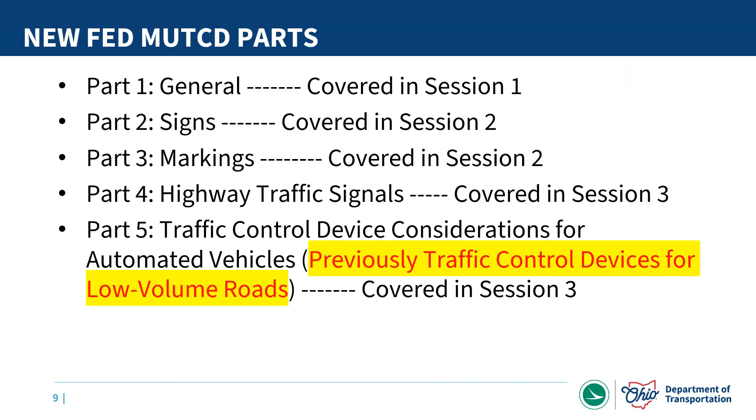Moving on, I want to talk briefly about how to go about using these two combined documents, broken down into a couple simple processes. First, take a look at which part and section of the MUTCD you're interested in, meaning the national MUTCD. Figure out what section is of interest to you. Once you've determined that, take a look at our Ohio Supplement table of contents. In that table of contents, we list all of the sections that have been carried over to the Ohio Supplement that have any Ohio specific content. If the area of interest shows up there, you just use that content in the Ohio Supplement. If it does not show up there, you just would be using the federal or national MUTCD. I want to stress that if there was any specific Ohio content in any part of a section, we made the call to pull that whole entire section over into the Ohio Supplement. We just didn't want users constantly leafing back and forth between the two documents. That was a purposeful decision.

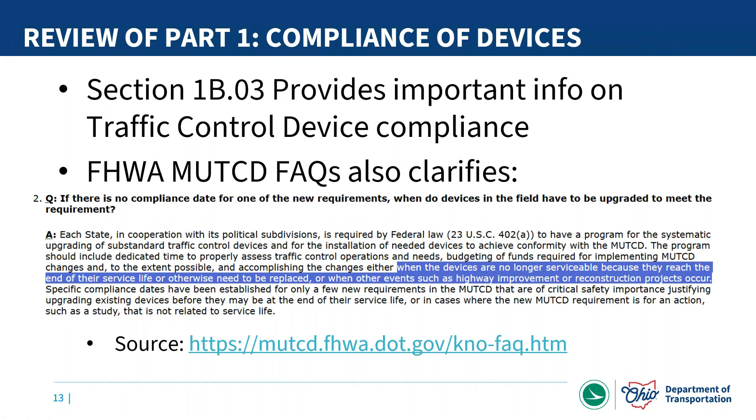Obviously, this is an important component. These have specific time frames for some of these different traffic control devices to be updated. So it's very important for the various jurisdictions to be aware of these timeframes.

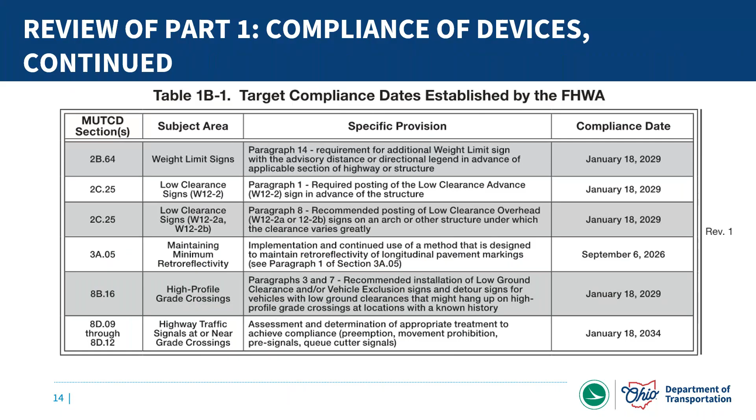Next, I just want to again do a quick review refresher on the definitions of the different headings that are used throughout the whole entire manual. This is not new - these headings were in the previous manual. You've got your standard, guidance, option, and support.

With standards, they have added the ability to deviate from a standard as long as there is a documented engineering study. That used to not be part of standards, at least initially. Now that language is part of the standard definition.

And then with the guidance definition, it's a small thing, but it's impactful. They did away with the 'but not mandatory' language in the previous manual. So essentially a guidance statement within the MUTCD needs to have either engineering judgment or engineering study in order to deviate from it. I think that but not mandatory language was confusing to some folks, so they did some clarifying there.

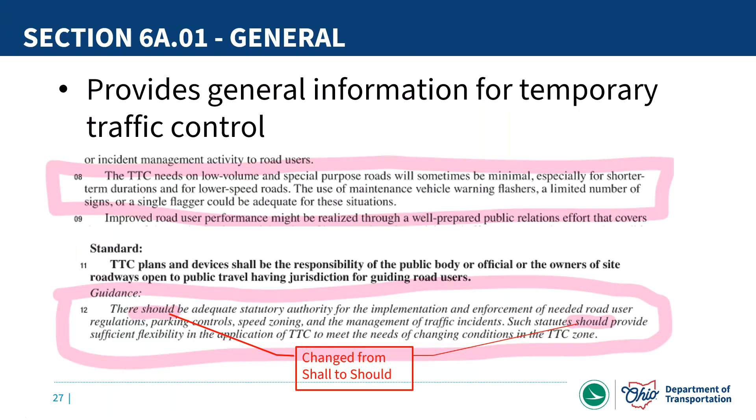Looking at 6A, there's just a couple things highlighted here up at the top. We talked about the low volume roads, and this is an example of where some content that used to be part of the previous chapter 5 of the previous MUTCD has now been moved into the different relevant sections. Down at the bottom, calling attention to this particular paragraph, how this was changed from a standard to a guidance statement, but obviously still important in either case.

With section 6A2, this is the fundamental principles of your different temporary traffic control zones. Most of this content came from 6B01 of the previous manual. If you're relatively new to temporary traffic control, this is a great section to review. There's a lot of good reference information here.

Continuing on in 6A02, there are 7 principles of temporary traffic control devices, and a couple of them I want to touch on further. Number 2: road user movement should be inhibited as little as practical. That's important, and there's a lot more emphasis on it now.

This came from some additional guidance in NTSB HAR 15-02. This talks about situations where the demand can exceed capacity, and where that could potentially lead to queuing. Obviously when you get queuing events, that can lead to some safety concerns and that type of thing. So some additional emphasis there.

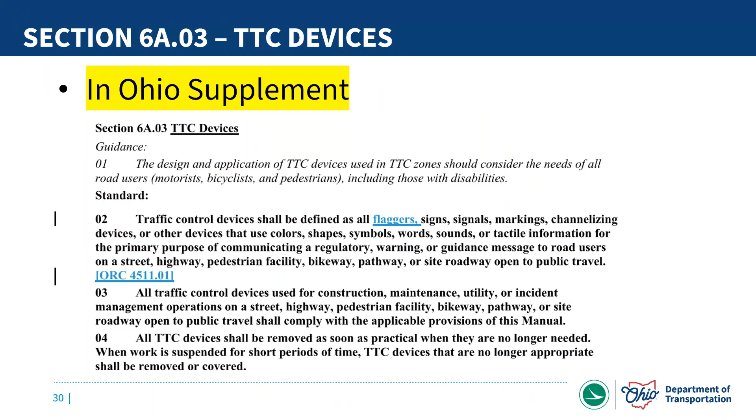So 6A04 and 6A05: 04 talks about crashworthiness of devices. All the different aspects and components of a temporary traffic control device - the majority of them have different crashworthy requirements. As far as ODOT projects, we have created approved lists of different devices that meet some of the different crashworthiness standards. We're still working through the transition period moving over into MASH crash testing, but for ODOT projects we have that information available for folks to use on our projects, and for any others that might want to check that information out as well.

As far as night work, there's a couple things to mention here. A lot of people automatically think, well, you just do the work at night, that's the solution. But you want to make sure that if you're doing night work, you have reduced traffic volumes, and your setups and teardowns of your zones are relatively easy. Otherwise there can be some issues that could arise, and that's what this is talking about, as far as some support information on that topic.

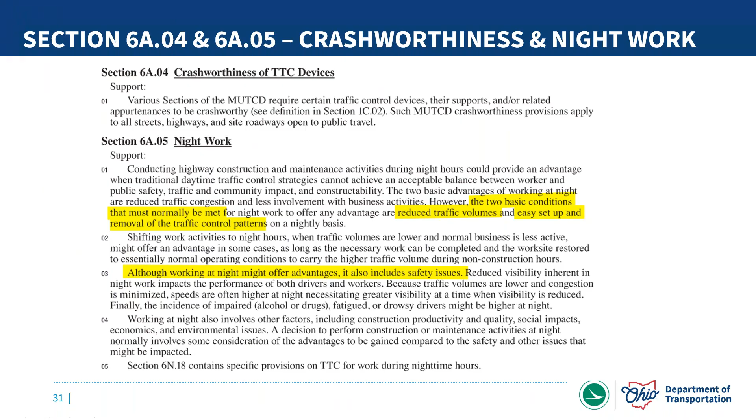Chapter 6B here, temporary traffic control elements. So we're going to take a look at all of these sections. 6B01 and 6B08 are part of the Ohio Supplement, so we'll take a little closer look here.

The other thing I wanted to point out about this particular section is this is another really good reference section for those folks that maybe are just getting started in temporary traffic control plan layout or design.

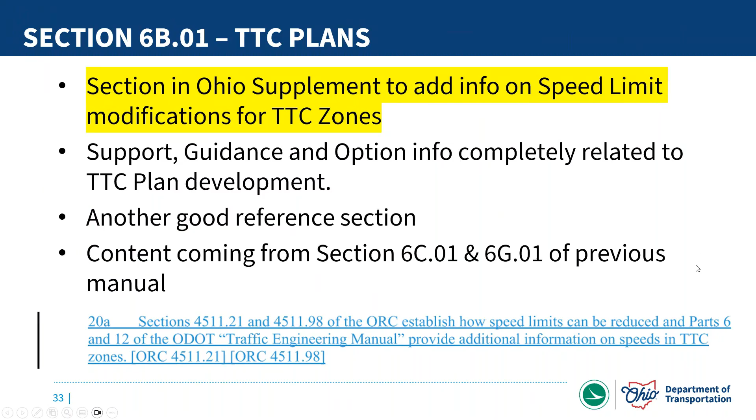Looking at 6B02 through 6B05, so this kind of breaks down the different components of a temporary traffic control zone. One thing I want to talk about briefly here, section 6B05, in fact, talks about mobile operations, and there's obviously some nuance with mobile operations that you need to be aware of, and how it obviously becomes much more difficult to provide channelizing devices for moving operations and things like that. So this has some good information there.

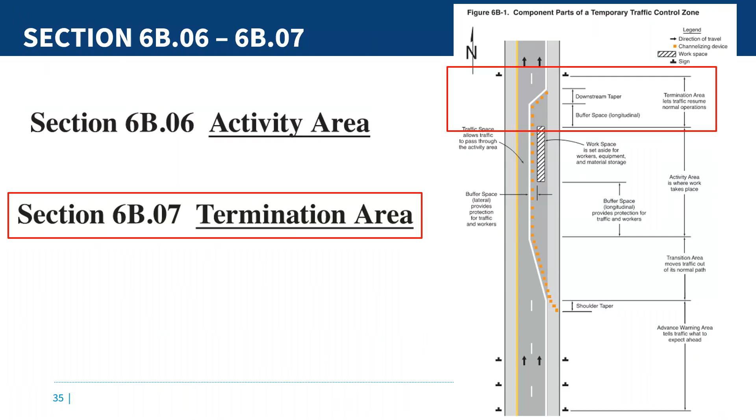So in section 6B08, this gets into the different tapers associated, from merging to shifting, shoulder tapers, etc. The thing I want to point out here is this section did have Ohio specific content. This content is the same content that we had previously in the OMUTCD document, but the change here is that we are increasing the length of the shifting taper in most instances. We give some criteria there as far as speed as well.

Again, with the taper section 6B08, just wanted to show this, there's a figure in there that's also part of the Ohio Supplement that just illustrates graphically what we're talking about as far as the shifting tapers and the modification that we have made Ohio specific.

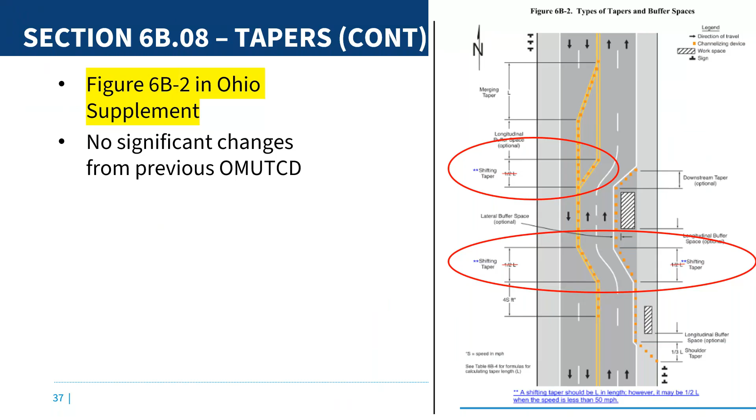6B09 just talks about basically the differences between a detour and a diversion. Diversions, I think a lot of people use the term maybe runaround as another term that's used, but that's basically when you're creating temporary pavement just to get around, say, a particular obstacle. Sometimes this is done, maybe a culvert replacement, that type of thing, even some bridge replacements do that type of a thing. Whereas a detour, you're actually closing the section that's being worked on, and you're using existing other highways to reroute that traffic around. So just the nuance between those two definitions.

Looking at Chapter 6C here, this gets into pedestrian and worker safety, which obviously is a big consideration. With the new manual, there's been an increased emphasis on safety of both the workers as well as pedestrians, bicyclists, etc. So this section gets into some of that.

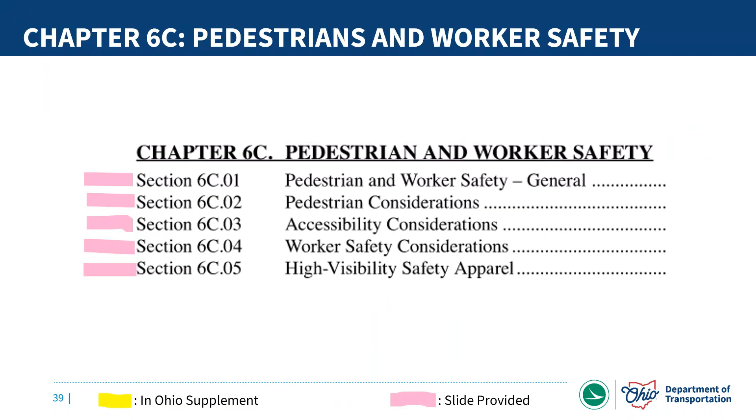Section 6C01. There's no real changes from the previous language here, but this again just emphasizes the need for the folks setting up these work zones to have the appropriate training and certification so that they can get the work zones set up appropriately and as safe as possible.

The next two sections, 6C02 and 03, get into some of the different considerations as far as pedestrians and accessibility. In a nutshell, if your particular work zone has pedestrian users, you need to be thinking about how you can accommodate those pedestrian users and not create more conflicts for those folks. Similarly, as far as accessibility goes, if an existing area has existing accessibility accommodations and we have to make adjustments there, work zones need to maintain those accessibility considerations.

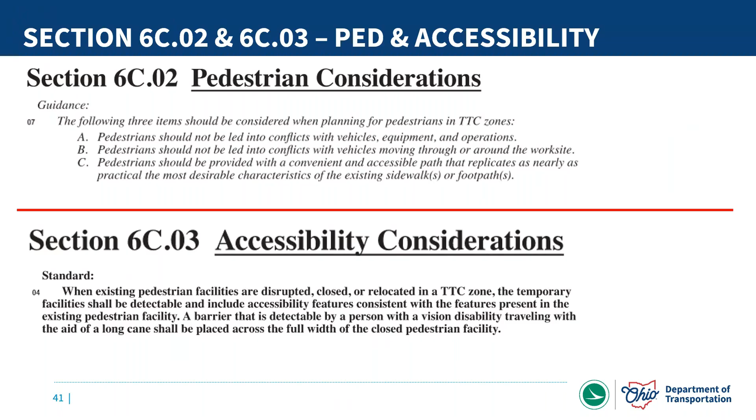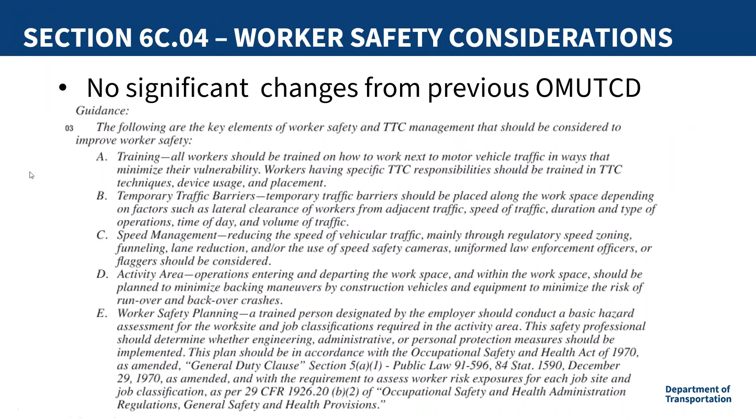In 6C04, again, this gets into worker safety considerations, and it lists off several different areas that anyone involved with setting up temporary traffic control needs to be thinking about, as ways to make these work zones a bit safer for our workers.

This continues on and talks about some of the different elements that can improve worker safety, like shadow vehicles if appropriate, road closures - obviously workers have increased safety during full closures - and then use of law enforcement officers or lighting and other newer devices, which we'll talk a bit more about later.

Section 6C05 gets into high visibility safety apparel. There was information in the previous manual that talked about this, but it was split up into multiple areas in Part 6 previously. So this is one of those examples where a lot of that information from the previous manual has been pulled from various locations and compiled into one particular section.

This gives the particular specs for your high visibility apparel. And this other highlight talks about how not only your roadside workers, but your first responders also need to be thinking about this high vis apparel as well.

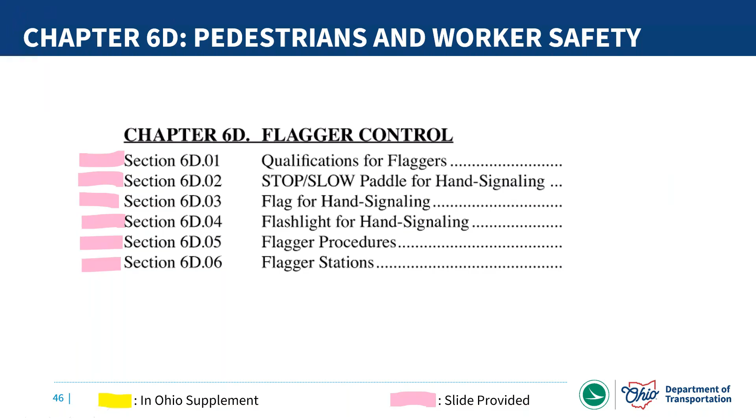First off, qualifications - again, just talks about what you need to be thinking about if you're looking to get one of your employees, if you're a construction contractor or work for ODOT or a city, what does a flagger need to be able to do? This gets into some of the things you need to be thinking about before just putting somebody out there to do the flagging operations.

These other sections here at the bottom, 6D02 through 04 - 02 talks about the stop slow paddle, which is our typical way of flagging a work zone in non-emergency situations. The other two they talk about are more intent - the intent is for those to be used primarily just in emergency type situations.

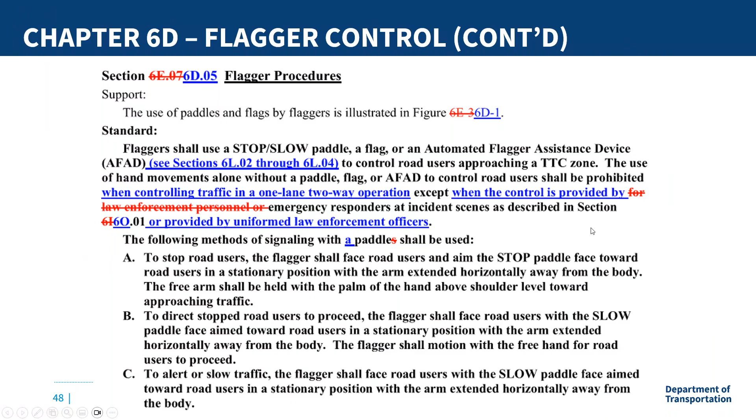These next couple slides, I just wanted to pull up and show - this is just a markup of the previous manual showing some of the changes included in the different flagging procedures, some addition of mention of specifically uniformed law enforcement officers. This is again just to show some of the changes from the previous MUTCD, and similarly here, again just showing some of the changes from the previous manual.

Obviously stopping sight distance, and sight distance in general, is a very important consideration when you're talking about flagging. So it adds a little bit of additional content there related to that.

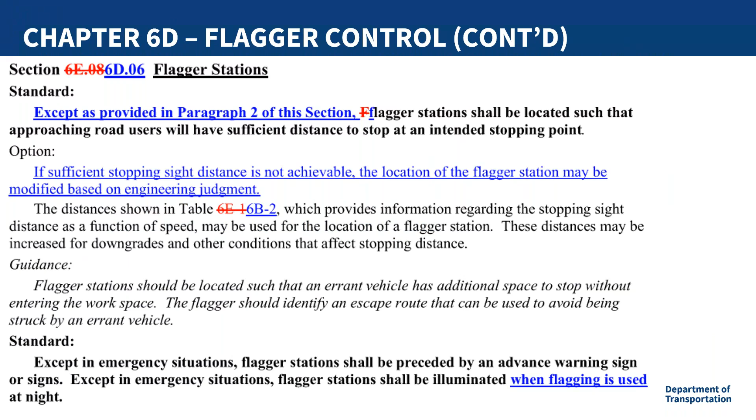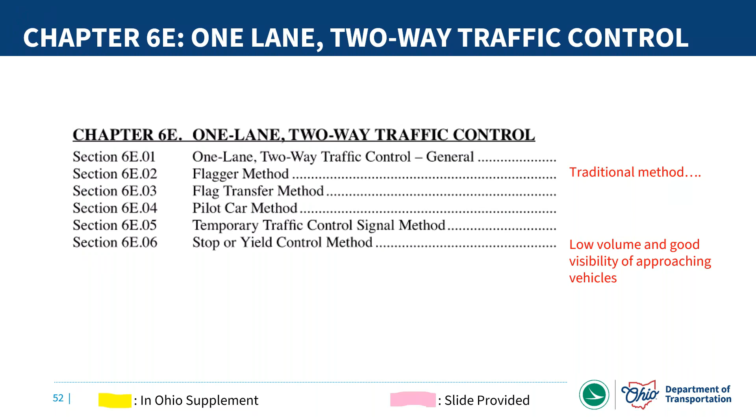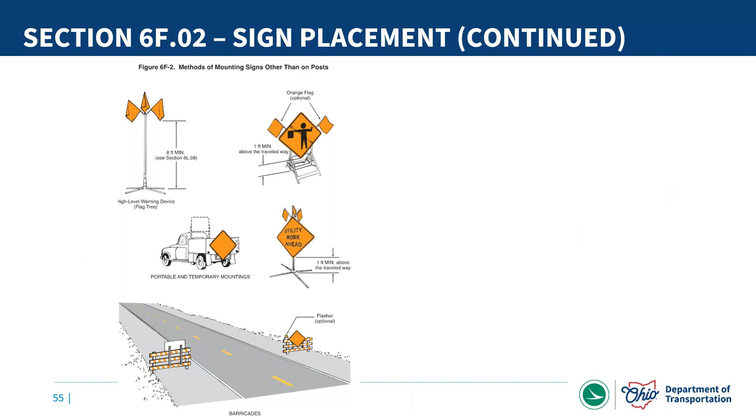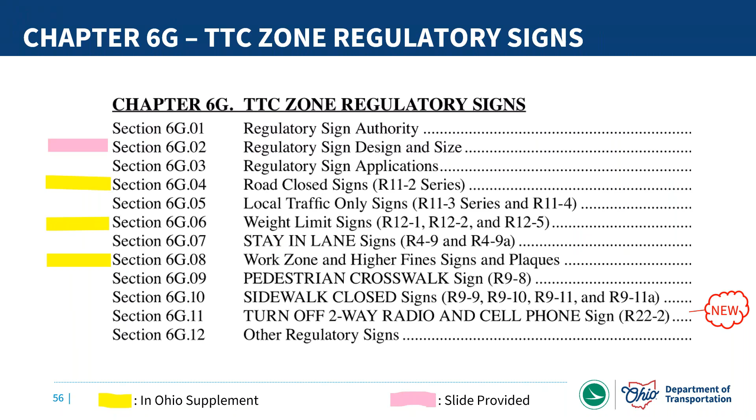I know it's probably pretty small to be able to read, but I just want to make sure you're aware of that. That's a good reference resource. And also just to be aware, these tables, as we were going through our Ohio Supplement, we made the decision not to include any of these tables over into our Ohio Supplement. In the cases where we do have Ohio specific signs, we have added graphic examples of those in some of the figures, and then we've also provided some references to where you can find more information out on those Ohio specific signs.

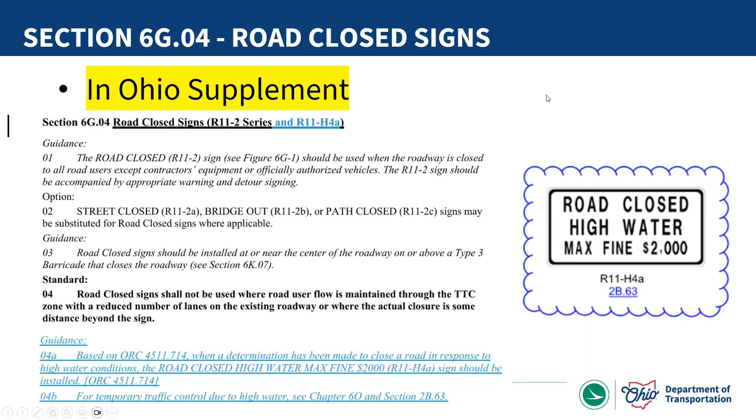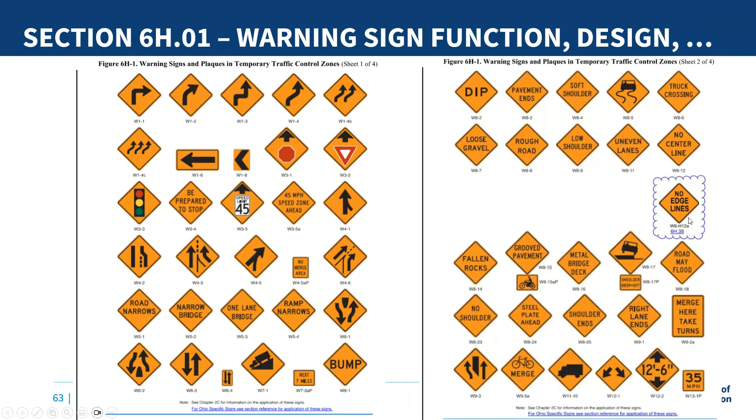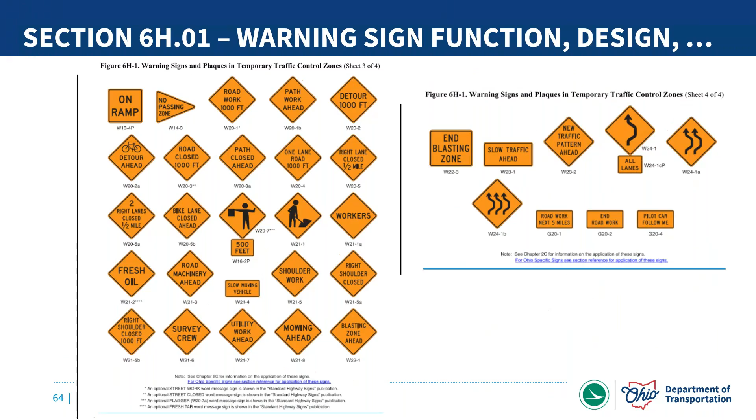And again, this is just the last few sheets of that same figure, and similarly, this is the table that goes along with it. So for reference information, this is a great place to start - the figures and these tables as far as the different signs associated and how to use them and where to find more information about them and the sizes.

So within our Ohio Supplement, the only warning signs that are Ohio specific - it's actually this sign here on the right hand side of the slide, the no edge lines, which we use quite a bit for resurfacing type projects and that type of thing, just to provide some additional information to motorists for those situations where the edge lines are not available on a stretch of roadway. And the content, the text content in that section just gets into the usage of that particular sign.

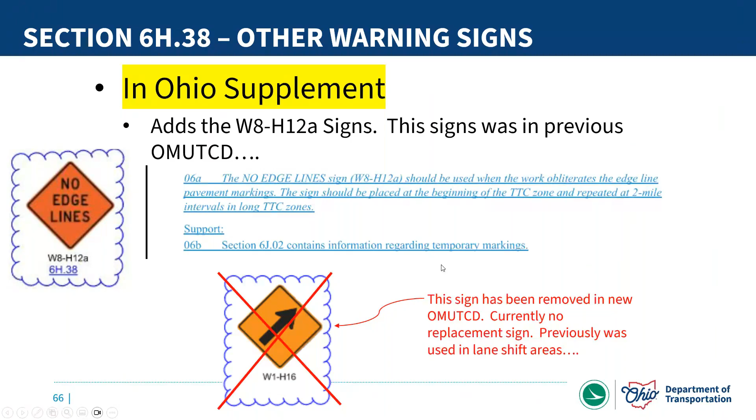All right. My screen seems to be frozen right at the moment here, so give me a second. Might have to get out of the slides and/or session here. I'm getting the blue wheel of death. Oh, all right. Actually, we skipped forward a couple of them. Sorry about that, technical difficulties. Hopefully we don't have any more of those.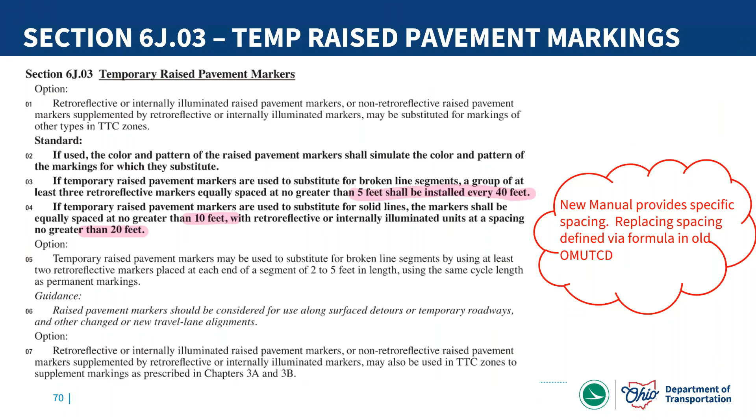Looking at Chapter 6K, this gets into the different channelizing devices that are available for use in the different work zones. In section 6K01, we do have some Ohio specific content, actually in one of the figures within that section. I also wanted to take a quick look at section 6K07 as well.

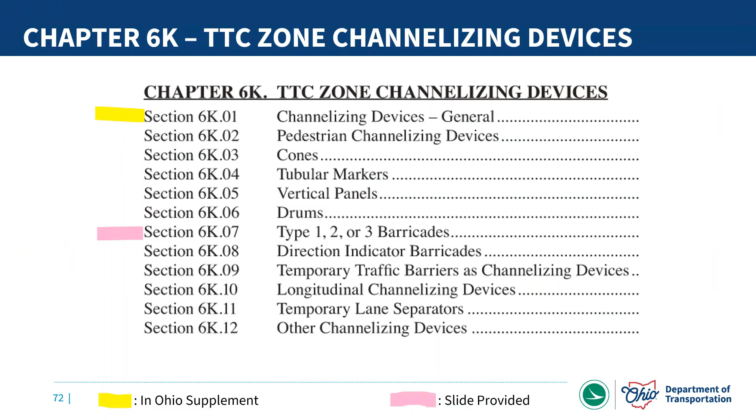So in 6K01 here on the right hand side, this figure is the Ohio specific content. Really what we did here is a few different things. There were a few areas in this figure where some clarification was needed based upon how the text was set up in the sections, related to tubular markers and cones, etc. So we've made a few updates there.

There also was a known error that we incorporated here as well. So we'll need to go back and check that known error to see if it was actually incorporated into revision 1. That would be something showing up in July if that is the case. This is one I have not specifically checked as of yet.

Moving on into the different barricades, I just want to call attention: whoever came up with the different type naming convention is a genius, because it's about the simplest naming convention you could ever come up with. Your type 1s are just one horizontal element, type 2s are 2 elements, and your type 3s are 3 horizontal elements or rails. So kudos to whoever came up with that, instead of making it alphabetical or some other designation.

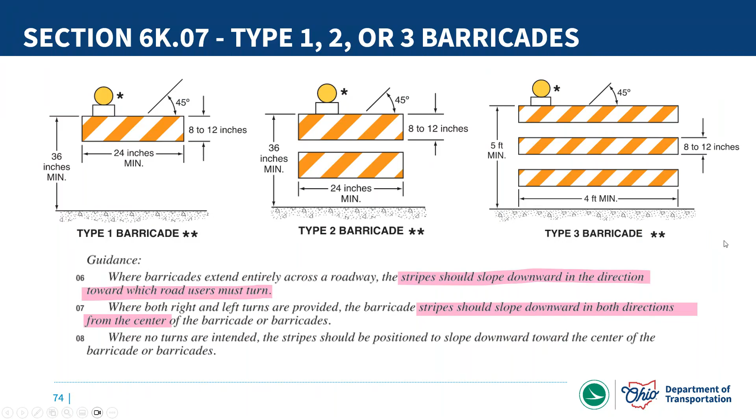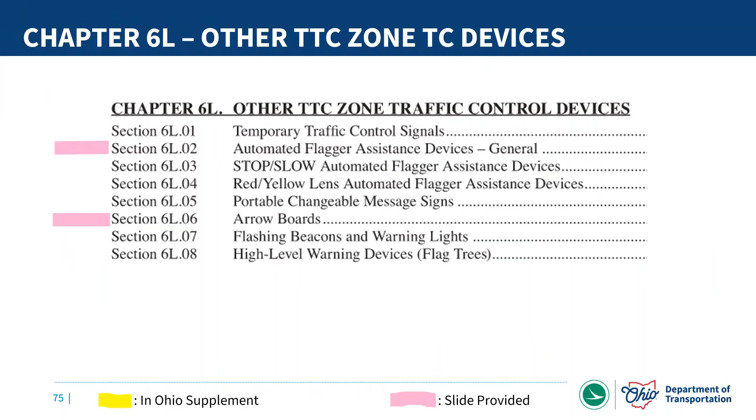So chapter 6L gets into some of the other temporary traffic control zone devices. A couple of these I want to take a deeper dive into: 6L02 and 6L06.

6L02 is the section on automated flagger assistance devices, AFADs. This is not new, it was in the previous manual. However, I want to call attention that we do have supplemental specs associated with the use of these devices, found in our 830 and 930 supplemental specs.

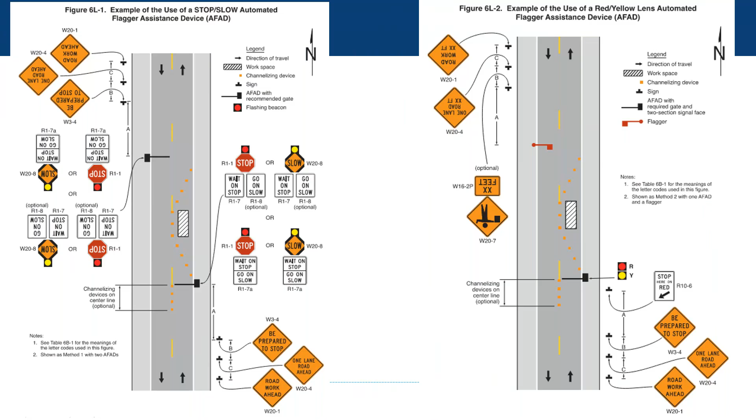Essentially what these devices do, in flagging type operations, is act as automated devices that help with that flagging operation. This next slide illustrates the setups with the two different types of devices. On the left side, you've got a device that will alternate the stop or slow paddle, and on the right hand side, you've got a red or yellow ball along with a gate. So those are the two different styles of AFAD devices and their intended usage. Again, we do have some supplemental specs that cover the use of those devices on ODOT type projects.

So where the confusion sometimes comes in is when you're talking shoulder work—say somebody's occupying the right shoulder. A lot of times you'll see an arrow board with the arrow pointing left, and what that's intended to indicate is that there's a lane closure. So it's giving some misinformation to our motorists.

Another component is that as more of these devices have additional connectivity built in, some have the capability to transmit information. So if it's a left arrow, that device would be transmitting that information signifying a lane closure. And if navigation apps utilize that information, again that's going to be misinformation and might cause confusion for motorists.

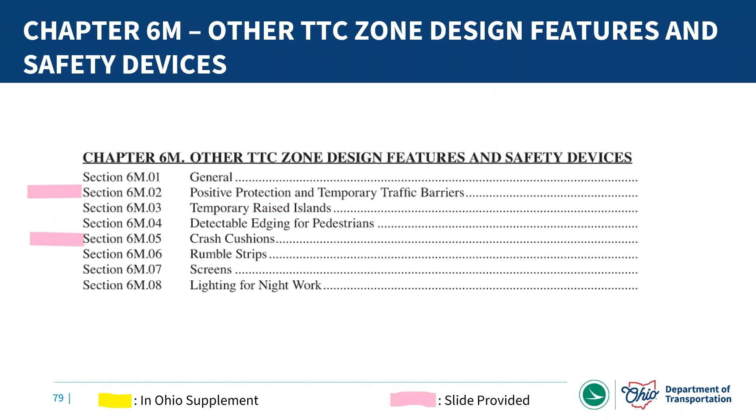Looking at some of the other design features for safety devices, there are a couple sections I want to take a closer look at: positive protection and temporary traffic barriers. There's been a lot of work done on the federal side with increased emphasis on positive protection, so I wanted to call attention to that. This section covers some instances where positive protection is definitely a recommended use.

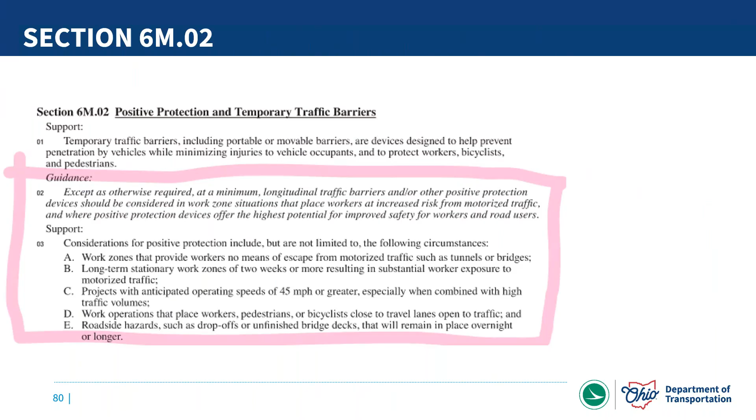Also want to take a look at 6M05 and talk about the crash cushion. We're seeing more and more of these—on portable barrier you'd see the stationary crash type cushions, and on a lot of vehicles now, trucks or trailers, you see mounted attenuators, so for short term or moving operations, these crash cushions can be mounted to the backs of trucks or a pull-behind trailer. These are additional safety options, and especially the truck mounted ones can be very beneficial for short-term operations with higher volumes.

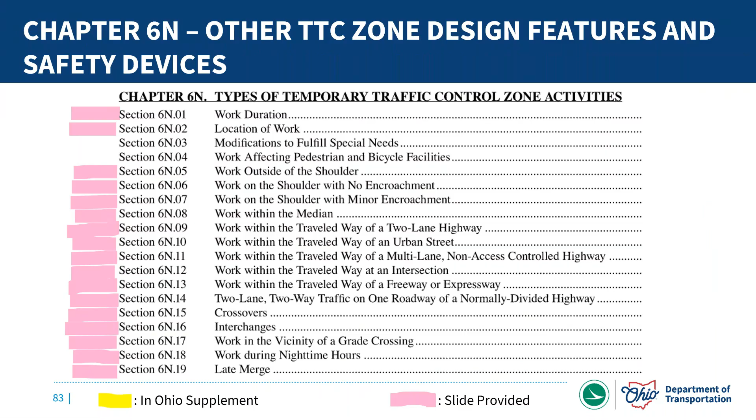The first one is obviously extremely important. Nothing in the different categories of work duration has really changed from the previous manual, but I really want to make sure people are aware of this, because it plays a huge part in the type of temporary traffic control zone needed for the type of work you're doing. This breaks out the different time frames—an extremely important variable for you to think about and determine on your particular work zone.

I continued with some additional text content here, and highlighted this section about mobile operations. I don't believe this was previously in the manual. I don't have notes on that, but I'm pretty certain this particular text talking about the guidance statement for a shadow vehicle being equipped with an arrow board or sign was not in the previous manual. So this is something to pay attention to.

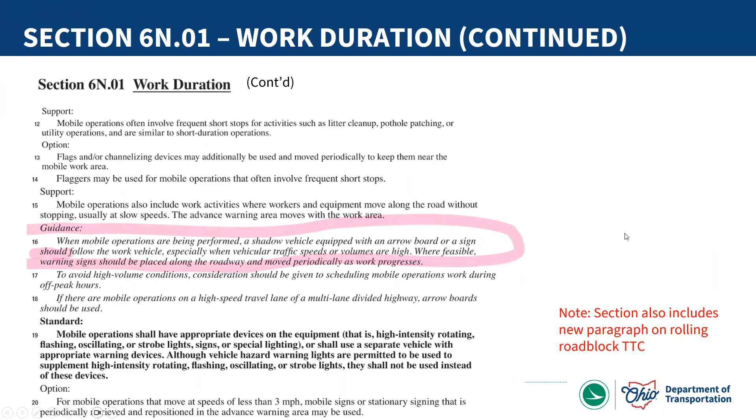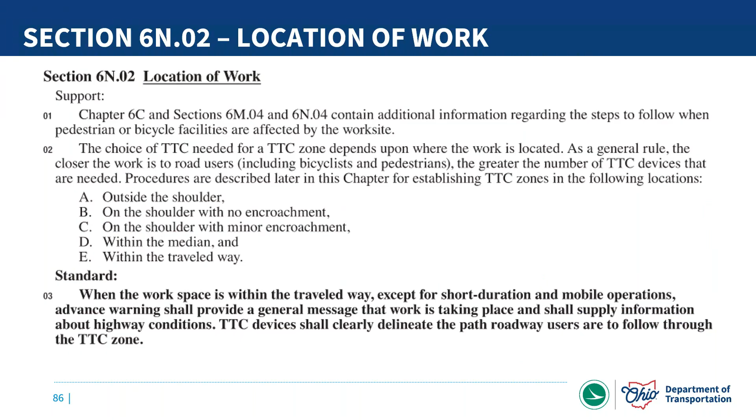I'll double check whether that's new content, but regardless, it's important content to be aware of, and it's part of this new manual. Next component here is another huge one as far as what you need to be doing when setting up your work zone. This talks about where the location of the work is actually happening, with different locations, and depending on these locations, this helps guide you on what appropriate traffic control devices are needed. So this section and the previous one as far as duration, you always want to be thinking about those two components for your particular project or maintenance activity.

Now we're going to jump into some specifics for different scenarios and the content associated. I'm not going to take a ton of time looking through all these, I just want to make you aware of several of them, so that in the future, if you have a particular project with this type of work, you have an idea of where to go to get more reference information. In this case, there were no significant changes from the previous manual.

This section gets into work on the shoulder, but cases where you're not encroaching out into the lanes. I highlighted some things here I felt were important: the standard language of paved shoulders having a width of 8 feet or more. If they're closed, at least one advance warning sign needs to be used, along with channelizing devices. I'm just paraphrasing there, you can read the exact statement.

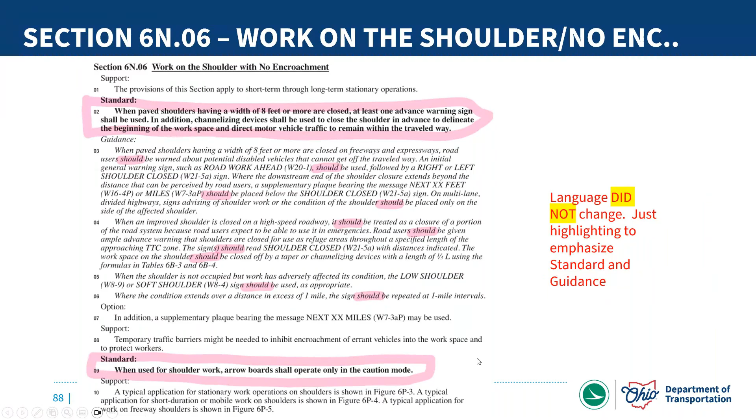This one transitions into a shoulder where you potentially have some minor encroachments. This gives you guidance, and talks about some numbers as to how much encroachment, and then again, based on your time frame of work and the volumes of that particular roadway, there are some options there.

As I'm assuming you're gathering from what we've been talking through, the setup of temporary traffic control zones has a lot of variables involved, and a lot of different options based upon some of the different variables. So there's just a lot of nuance associated with it.

Sections 6N.08 and 6N.09 talk about work within the median, and then when you're actually working out in the traveled way of a two-lane road. We've already touched on situations with work in the traveled way of a two-lane, because a lot of times those could be flagging operations, or there's also some talk here about detour scenarios as well.

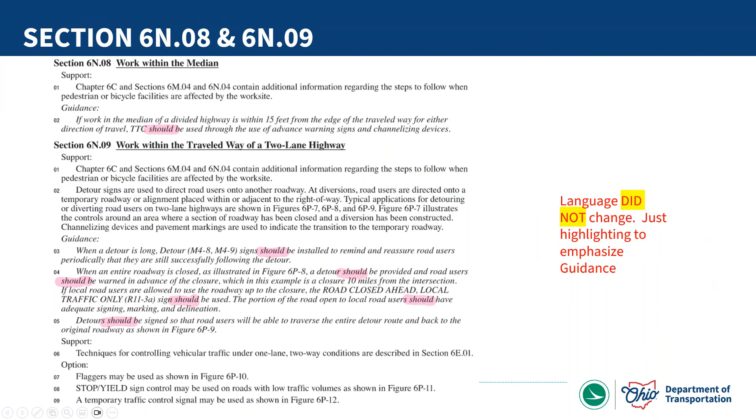Transitioning from that, the previous section was more of a rural type application. This section gets into more urban type applications, and how there are some different considerations. In particular, you need to be aware of other users, whether it's bicyclists, pedestrians, or maybe even transit, making sure those uses are also being considered in your temporary traffic control zones.

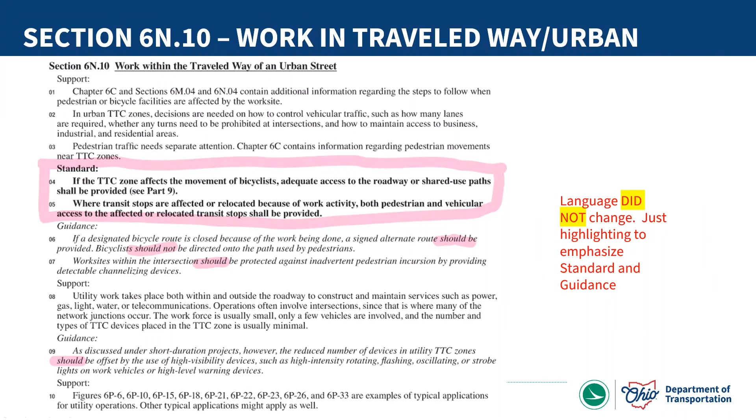I kind of debated on highlighting certain things versus not, because depending on your circumstance, some of the stuff I did not highlight may be important for your particular circumstance. But I'm just trying to call attention to some of the important aspects. There could be other things you also need to be taking a look at in your particular project.

This section gets into intersections, and again, talking about pedestrian accessibility, making sure that's being considered. The progression here is kind of from your simpler work zones to some of your more complicated type work zones.

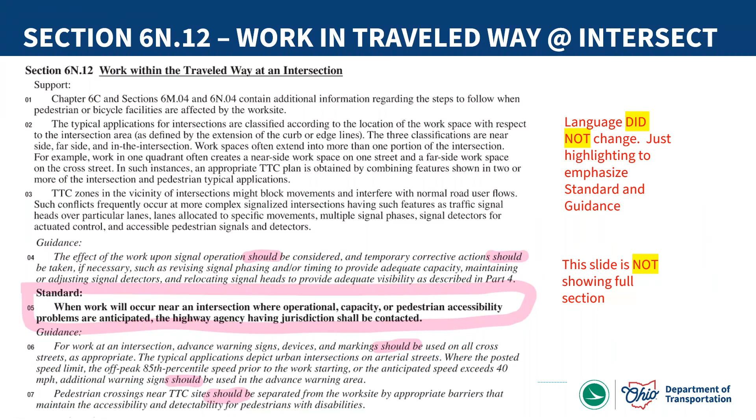The next section talks about temporary traffic control when there's work within a freeway, within the traveled way. There's been some additional guidance added about assessing queue lengths as part of your temporary traffic control plan. That's a very important aspect when it comes to queuing, especially if you've got queues backing up in one lane while other lanes are moving at significantly higher speeds.

So here, 2-lane, two-way traffic on a normally divided highway. This would be, say, you've got a 4-lane road, two lanes each direction. You're taking one side completely, working on it, and shifting everybody to the other side. This section gets into some of those considerations.

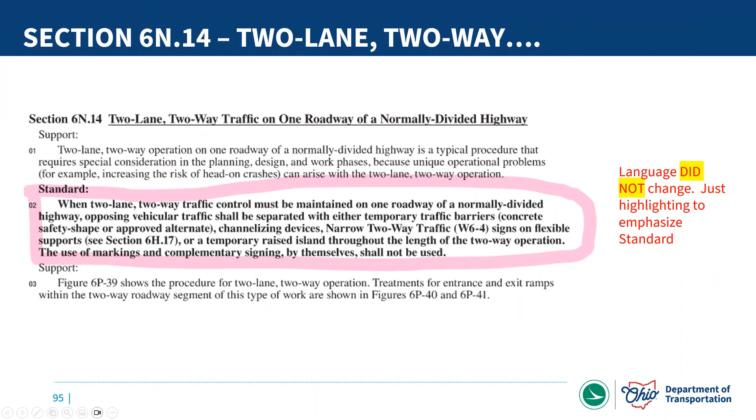These next two sections talk about your crossovers and your interchange applications. I'm not expecting you to read every last bit of this today, but if you have projects where these are a consideration, you'll have an idea of where to go look for more of the details.

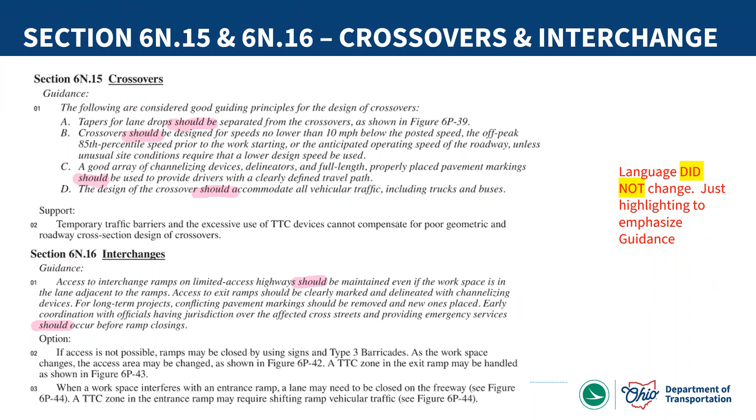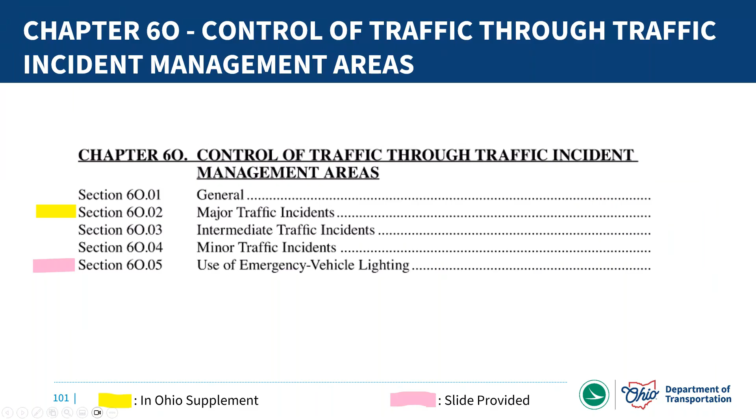There is one part of this section that is part of the Ohio Supplement, and we will talk about that - it's 6O.02. I also want to talk a little bit about 6O.05, which gets into some lighting considerations. So we'll jump in here.

6O.02 is in the Ohio Supplement. It's primarily just a cross reference to call attention to, if there is an incident response for a high water event, that Ohio specific sign for use, if there is a road closure or that type of thing as part of an incident response. That's really the only Ohio specific change there.

To talk a little about 6O.05, what I wanted to discuss is, while I totally understand a nighttime incident, you have to have light to respond and do the things you need to do. But at the same time, a couple things I highlighted here - there needs to be some thought and consideration given to only using the lighting that you need, and not having additional lights or so much light that it could potentially be distracting for additional motorists approaching that incident area.

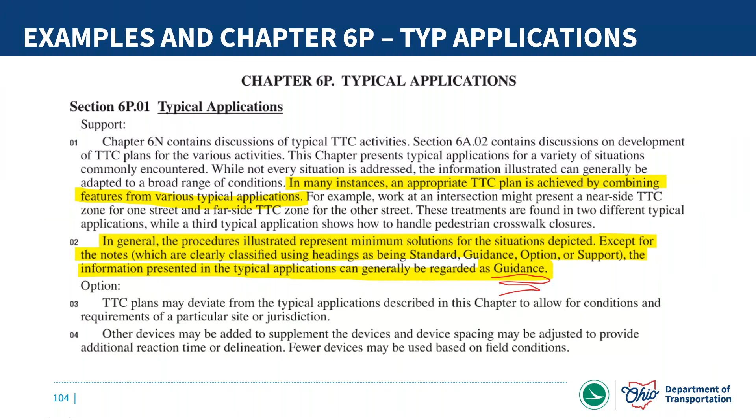That's important to understand. Obviously the notes are pretty straightforward - standard, guidance, etc. But the typical application graphics themselves, based on the statement here, are to be considered as guidance. So we'll take a closer look at some of the different typical applications. We'll hit on all the ones that are part of the Ohio Supplement. I know this is probably difficult to read, but Table 6P1 lists out all of the different typical applications here. I crunched it down to fit on one slide, but we're going to be talking about all the yellow highlighted ones, which are part of the Ohio Supplement.

So we'll take a look at a slide with all of those, and then we're also going to look at a handful of other typical applications that have some things I wanted to emphasize or mention.

But before we do that, I want to jump into an example here. Before I start into some of these examples - we've pulled some pictures from different folks. The intent of this is not to be throwing shade at anybody, because setting up work zones is not easy. There are a lot of variables, and there could be circumstances that don't show up in these pictures that we're not aware of.

I just wanted to look at a few example photographs, talk a little bit about them, and then talk about some things that maybe could be done differently, or some things to at least be thinking about in these types of circumstances. So that's the purpose of these different examples.

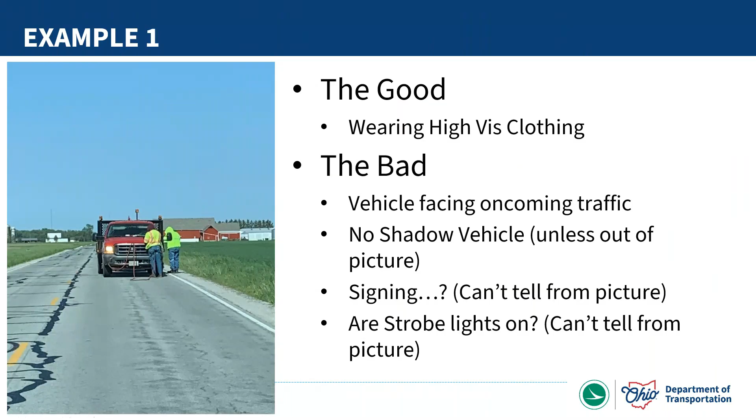So some suggestions here: as far as moving operations, there's nothing really in the MUTCD that I'm aware of that explicitly gets into that, but I did add in a couple of ORC references that would give some support to the idea that the work, if it is a moving operation, or if it's not, that the vehicle ideally is facing with the travel direction. So that would be one consideration.

Also, providing a shadow vehicle - this kind of looks like a rural area, so it may not necessarily be required. However, there's a lot of benefits to having that shadow vehicle, and if this is a mobile operation, again hard to know exactly, but this section of the MUTCD does talk about provisions for having a shadow vehicle.

As a guidance statement. Also, we talked some about the signing - if there is no signing, providing some of that advanced notice signing would be helpful in this situation. And then also the vehicle lighting, making sure that that is on for this particular vehicle.

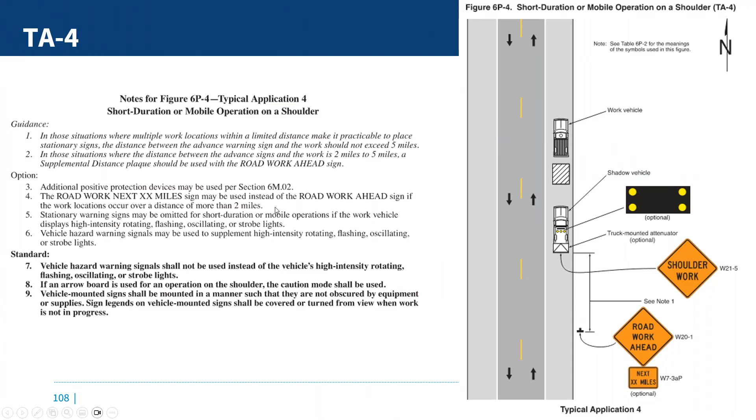TA8, so this one is part of the Ohio Supplement. This gets into, this kind of details a detour scenario. And the reasoning that this one is in the Ohio Supplement is that we had some Ohio specific language here with the notes, and then we tweaked the graphic a little bit as well with some Ohio specific stuff.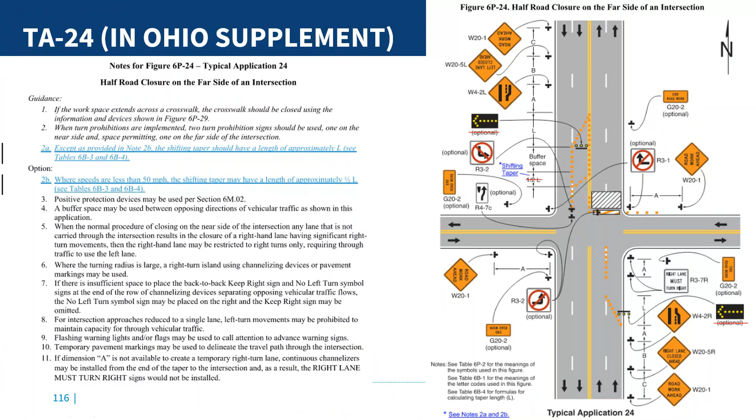TA 24, this is another one, intersection closures. Again, the primary reason is because of the shifting taper that's in the Ohio Supplement. And then we also did another instance where the optional was listed, that we just struck out for the actual arrow board.

TA 26, another example, work in the center of an intersection, and this one also has some shifting taper references. So this is again another occurrence of just being in the Ohio Supplement because we wanted to be consistent on how we were illustrating these shifting tapers.

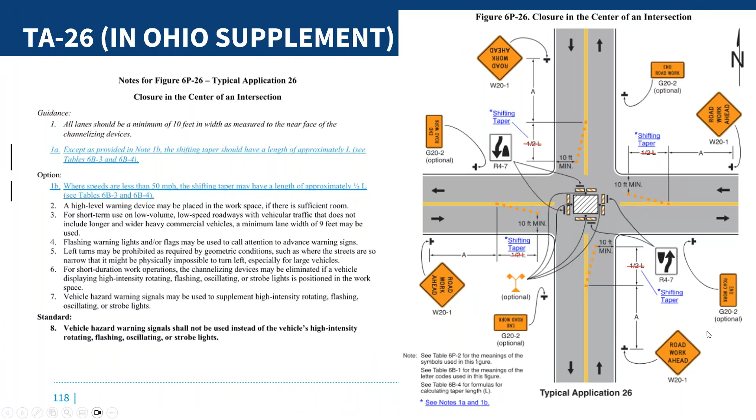TA 31, I think you're getting the gist here. It's kind of repetitive, but again this is one where shifting taper, we wanted to make sure we're consistent there as far as shifting taper. And this one also does have the arrow board consideration as well, where we struck out the optional.

TA 32, so this is a half road closure of a multi-lane. Again, shifting taper is the primary Ohio specific content change here. And in this particular case, there was no optional arrow board, so we didn't have to make any changes there.

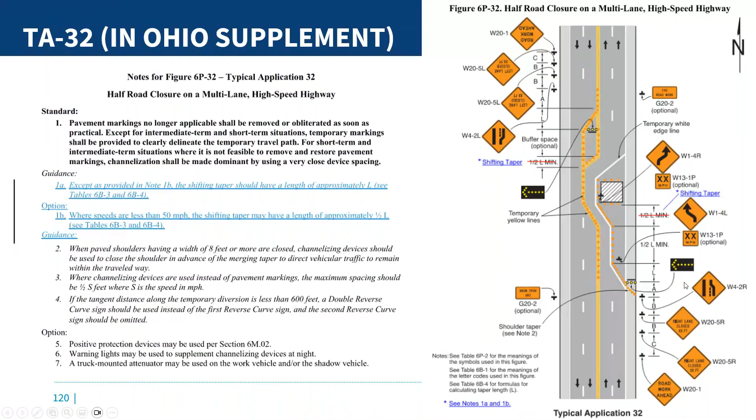So here's another example just to take a look at. So here we've got, it looks like, I'm not exactly sure what they might be working on, some curb here or something. I'm not 100% sure, but a couple of the good things I see from this example.

The workers are wearing some high-vis clothing. It's hard to see at the zoom on this photograph, but they do have some high visibility apparel on. And then the other good part of this is there is some use of delineators, actually channelizing devices, so in this case they've got cones.

A few of the not so good things, again we got a work vehicle that's facing the direction of traffic. Hard to tell from the photograph, but it does not look like there's signing or an arrow board, since we've got a lane closure situation here. An arrow board would be appropriate.

And then the other thing here is, don't know exactly what the spacing is here, but certainly the spacing of this taper, the merging taper, is pretty short. So just a little quick calculation, assuming a 45 mile per hour zone and a 12-foot lane, you're looking at 540 feet. I'm pretty certain they're nowhere near 540 feet with this particular example.

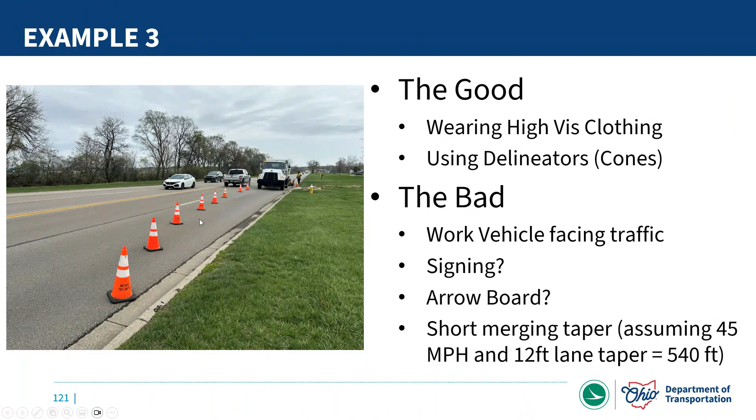So some suggestions would be looking at the signing and providing the signing that can be found on TA 33, in advance of this lane closure. Also providing an arrow board, and I gave the MUTCD reference for where to find that. Correcting the merge taper, so that would be lengthening out that merge taper. Again, that's dependent upon the speed, so that would need to be determined based on the variables, the characteristics of this roadway.

And then another potential suggestion is, depending on the volume, a truck mounted attenuator before the work zone, kind of in this buffer area. It's hard to tell, there's not a whole lot of buffer area here, so maybe lengthening that a little bit could be another consideration.

So TA 35, this shows a mobile operation on a multi-lane road. So this one, you've got two shadow vehicles, one in the shoulder, and then one out in the lane, ahead of the actual work vehicle. Both of these, they've got the arrow boards.

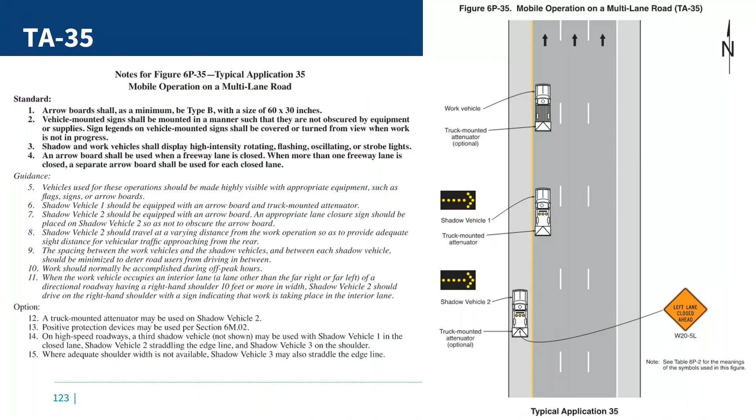Moving on, another typical application in our Ohio Supplement is this lane shift on a freeway, a typical application. The reasoning is solely because of the shifting taper. Note that this particular slide has more notes than what I did a screenshot of - there are 3 or 4 more items below. I didn't show those just for space considerations, but there are some additional notes that go along with that.

TA 38 is another one in our Ohio Supplement. This is another instance of a shifting taper where we wanted to note that, and that's really the only Ohio specific change on this particular typical application.

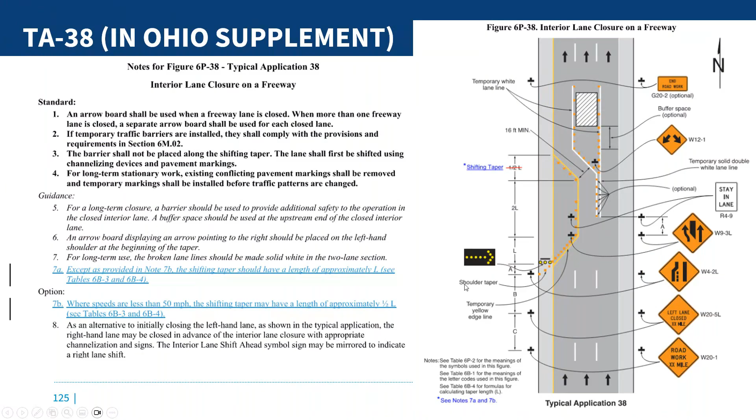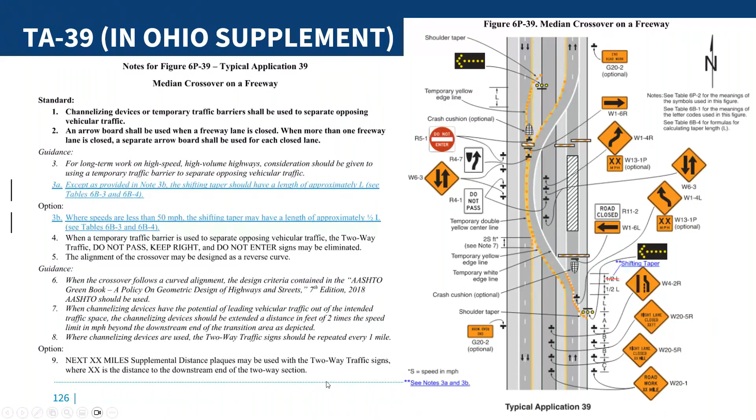This one is a median crossover typical application. Again, we've got shifting taper updates to show the Ohio specific information there. This is another one where I didn't have the space to get all of the notes on this particular slide.

This one actually is in the Ohio Supplement not because of the shifting taper considerations. We added an additional optional sign here at the point where you're diverging from the main roadway, just basically indicating the exit ramp is open. That was something we previously had in the previous OMUTCD, and we just carried it forward to this similar typical application.

TA 45 is in the Ohio Supplement. Again, it's a shifting taper issue. Here I just took a full page because there are a lot of notes associated with this one.

This is your reversible lanes using movable barriers. Not something that's done a ton, but it's definitely a tool in the toolbox, especially if you've got significant differences between AM, PM peak type volumes. This is something definitely to be considered when you've got those kind of situations. But again, really the only Ohio specific change here was the shifting taper.

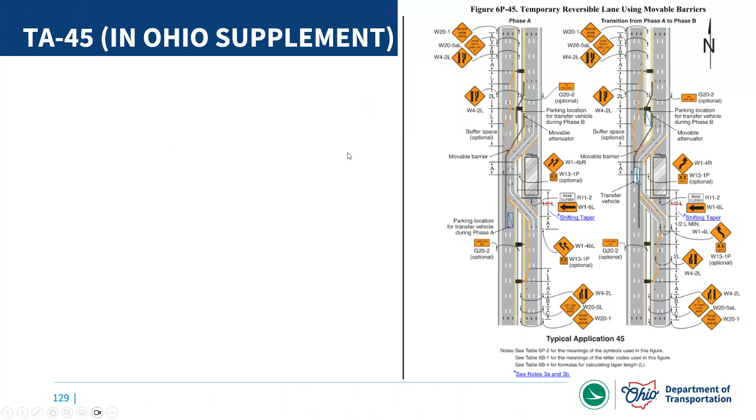For this type of work, obviously this is a difficult scenario where we don't know the circumstances. Maybe this was something very short term, but full closures could be appropriate depending on the situation. So it's just looking at some things that you see out there in the field, and hopefully these are spurring some thought on, hey, we had similar situations - maybe there's a few things we could do here differently to improve that situation for both the workers and for the traveling public.

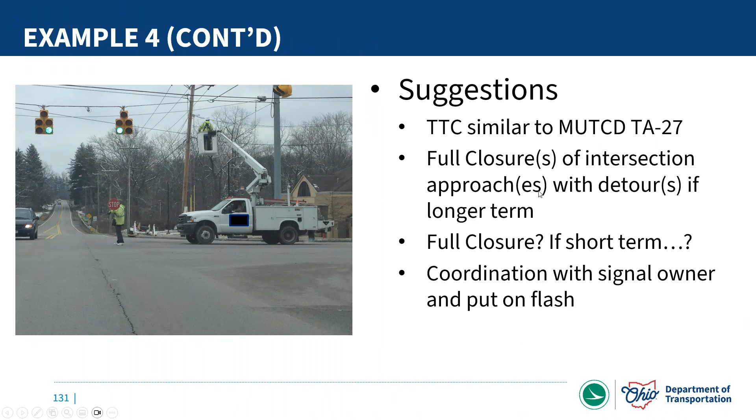These next few slides, we're going to look at real quick. I just wanted to pull them in to call attention to how the new manual has added 3 new typical applications intended for use at roundabouts or circular intersections. There's a lot more of these types of intersections being built all around the state, all around the country, so this is the first time the MUTCD has provided typical applications to address how you set up work zones in these types of intersections.

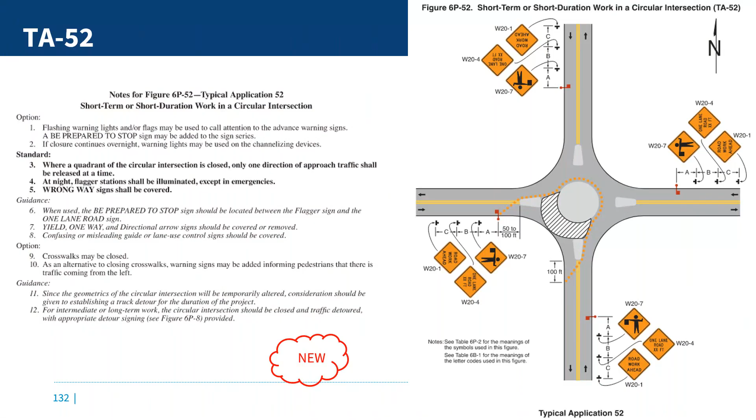The first scenario is just a short-term, short duration type setup. This one gets into the flagging of a single lane circular intersection, for a longer term scenario. The third one gets into what would be needed if you have a multi-lane roundabout and need to close that interior or inside lane. So all 3 of these are new typical applications intended for some of these roundabout scenarios.

And again, these are minimum recommendations. Based on your specific location, there might be some additional traffic control needed.

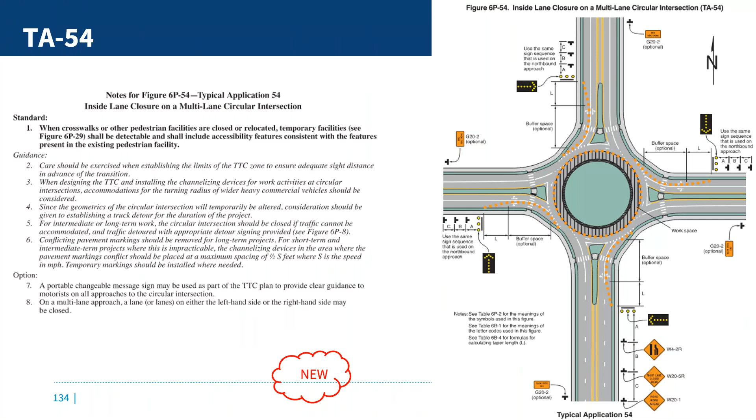Some suggestions here: setting up the signage and channelizing devices per that flagging typical application would be a great improvement. Also, increase that spacing so motorists have more time to appropriately respond. And it would give that work zone just a bit of extra separation there.

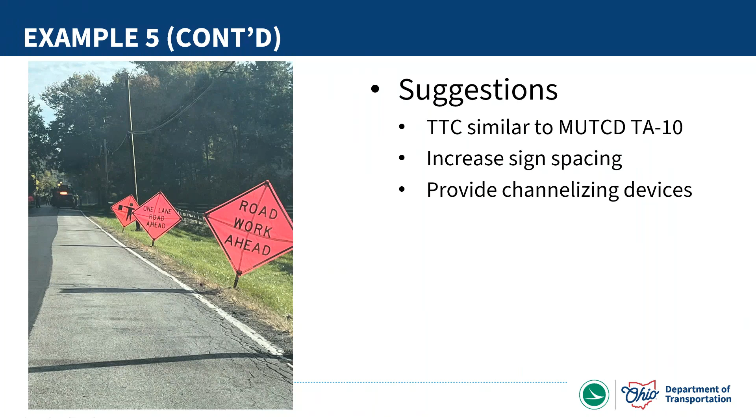And then also just a link to our previous MUTCD. On that page, there are actually links to all of the prior ones before 2012, or at least several iterations prior of the OMUTCD, if there were any needs to access those for historical or archive purposes - that information is out there. And with that, we will wrap things up and open it up if there are any questions still hanging out there that we need to talk about.